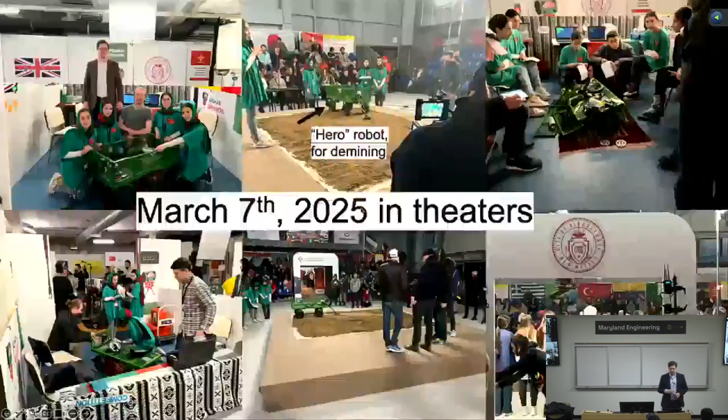That movie has something to do with when I was at WPI faculty. The director, Bill Guttentag, reached out to us because he saw a YouTube video where one of our demining robots was featured. He said, I want that robot for the movie. I said, unfortunately, that robot doesn't exist anymore. He said, well, thank you, but it was worth reaching out. Then I said, wait a second, what do you actually want? He said, we need this demining robot. I asked, can you give me the movie script? He said, yeah, here it is.

So I read the movie script. I changed some technical details they probably didn't get right. But more importantly, it was very clear that these girls, who were not allowed to learn about computer science, were building these robot systems. The person supporting this project was the person who actually did that in Afghanistan, Roya Mahboob, who now lives in New York City and had a huge role when the Afghan government collapsed and American troops pulled out. They got many more girls out because of her. But this is based on a true story.

When they reached out to us, I said, why don't we build you a demining robot from scratch? Since this robot is being developed in Afghanistan, maybe it's not the Air Force robot for $20,000, but something cheaper and simpler. So we got a little cart from Harbor Freight and put a DC motor beneath it. You can see here how this is the robot. There's a little moving arm, which is a windshield wiper we got from a scrapyard, and one of these metal detectors like seniors use at the beach looking for metal. We put that on there, and the entire robot essentially was very simple.

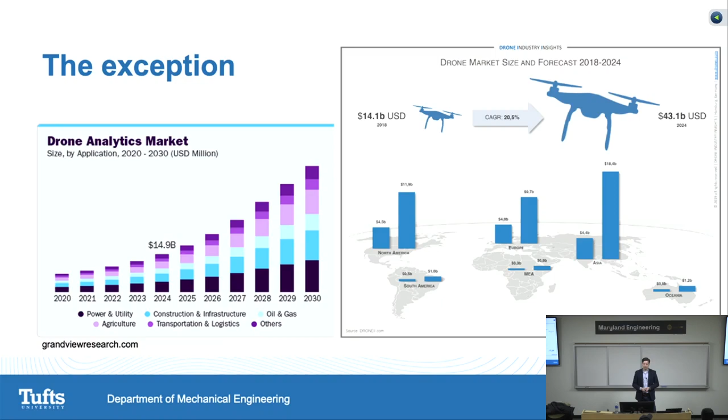So why is that possible? There's now such a big economy behind it, and the demand has increased so much over the years that you can actually purchase them at a fairly low cost. So now drones are definitely possible to purchase and use in large quantities.

However, my lab is interested in robots that are not just drones, but also terrestrial robots. The question is, how can we make increasingly intelligent robots without increasing their cost? If I have an infinite amount of money, I can just spend money and get more intelligent robots. But how do we increase intelligence without increasing the cost? That's a question we ask in our lab.

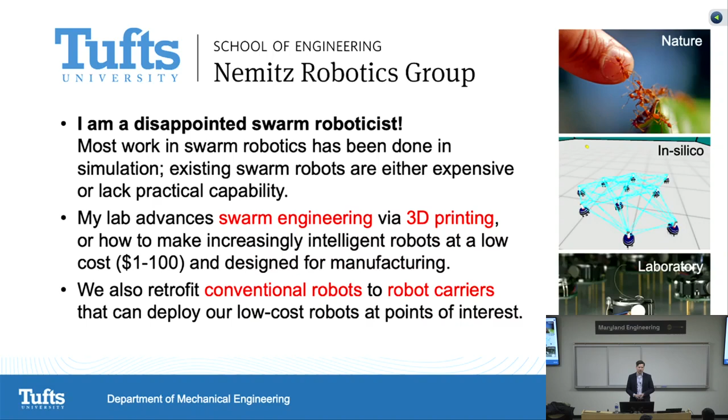On top of that, we're also interested in conventional robots and retrofitting them as robot carriers, so they take our little robots and put them at places where they can do real good. What that's actually useful for, I would like to explain here.

What we envision is this kind of nested deployment scheme, where you have a rover that carries a drone, and that drone deploys these smaller robots. For instance, it finds a landmine and detonates it. Because the robot is so low in cost, it doesn't matter - the robot will be destroyed, but it will also get rid of a landmine, saving lives.

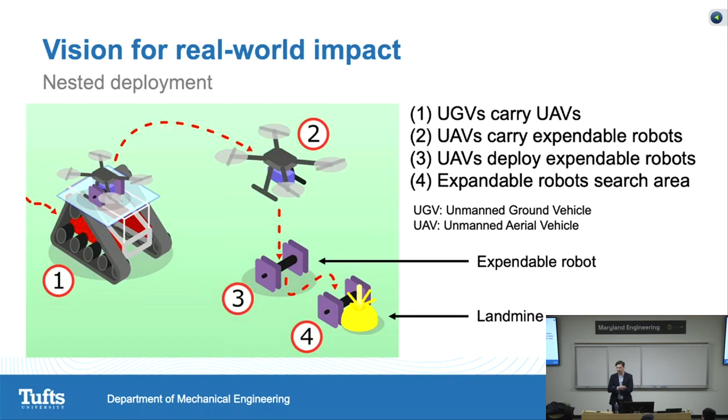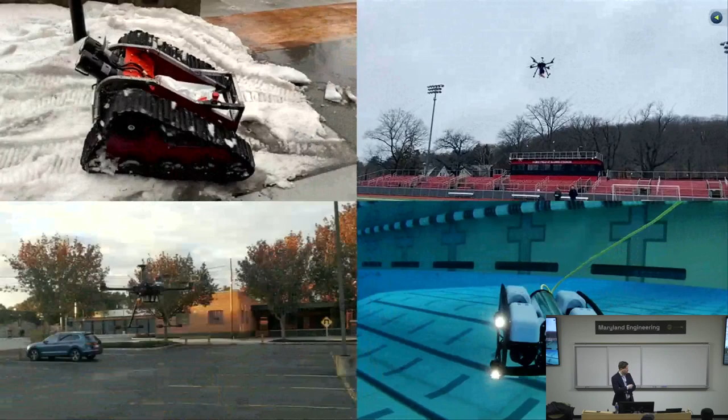These are the robot systems we've been working on: heavy payload drones, tracked vehicles. You can see this kind of nested deployment here in the top right, and also underwater robots in the pool. We use these robot systems as robot carriers.

When I did my postdoc, the question my advisor George Whitesides always asked was, who cares? Why would anyone care about me pushing swarm robotics? My personal answer is similar to what we did in the movie with the demining robot - to fight the entire demining problem of the world. One of the issues is that with landmines, mostly people who die from them are children, because they tap onto them, they fall into them, and they just detonate. So what can we do about that?

One of the issues when you study this a little bit is that to plant a landmine costs like $30, but to get rid of one is significantly more expensive. And as long as we don't build robots that are as cheap as that $30 landmine, I think finding a robotic solution will be interesting and possibly difficult.

So there are lots of different ways of doing demining. We focus on building very low-cost robots that are deployed from helicopters, and then they ultimately go onto an area and crawl around, find a landmine, and detonate it. There are different ways of detonating them, of course, so there are questions that can be answered.

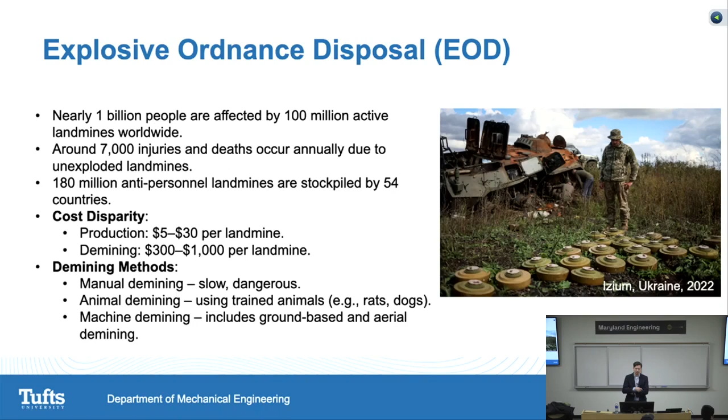Okay, let's try this again. So we just had faculty interviews at Tufts, and this happened to two of our candidates. I said those were always Windows laptops, and now I'm standing here with my Mac, and I feel really silly. So maybe putting a power... there we go.

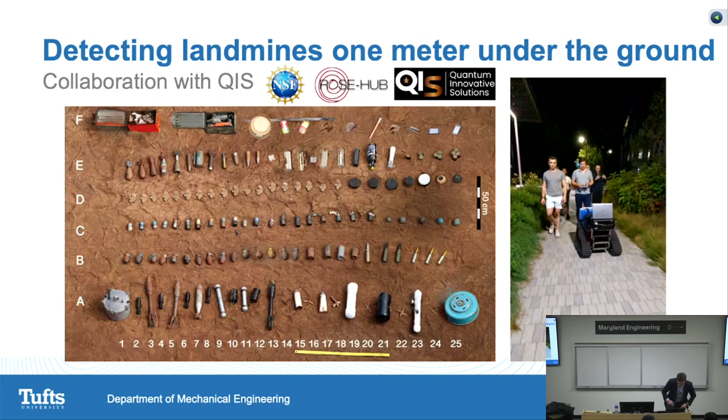This is us moving around with that robot, in Oklahoma, in the minefield we're working with. There are over 120 different landmines deployed at different, or the same, depth, down to one meter, and they're all sorts of different landmines. Some are Russian landmines, some are made from glass, and we were able to show that with the sensor in our robot system, we can detect essentially all of them.

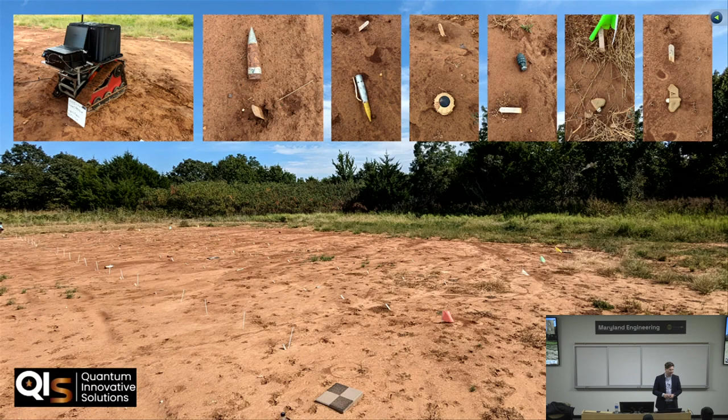Obviously, when you're trying to detect landmines, you're not driving over them with a tracked vehicle. So in this case, we only facilitated testing whether the sensor actually works for finding these landmines. Then Bloomberg was reporting on that, and people got really excited.

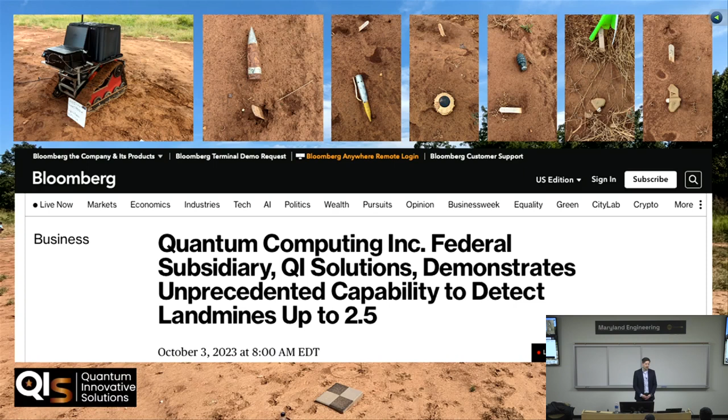Shortly after, we jumped on calls with some of the Ukrainians. I'm not sure they were for the Ukrainian forces, but there were some government links. Ultimately, we talked to a bunch of Ukrainians, and they were interested in using that technology to find landmines, as they clearly have issues with that currently.

So, landmines. I quite like to help with missions that deal with demining, and then also we go in the field and find them with collaborators.

But I'm also working with the Department of the Army on hydrogen-powered UAVs. Why would I care about that? Well, hydrogen-powered UAVs can operate for 24 hours, and in this project we autonomously refuel them with robot systems, which allows 24/7 operation.

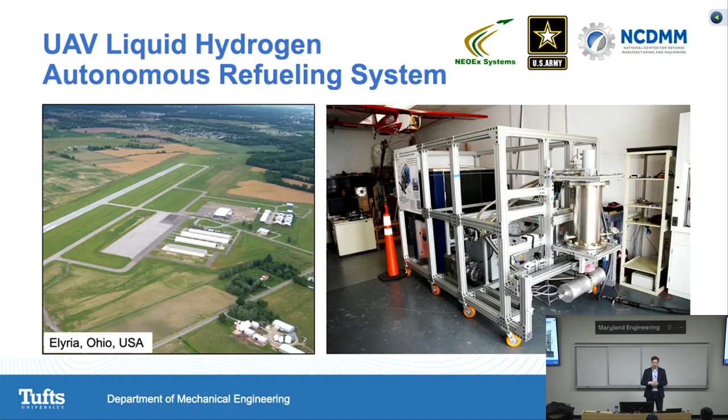These UAVs are very useful for deploying these smaller robots that we develop. My research is about all the other parts that have to be put in place in order to make demining actually a reality. We not only have to find landmines, but we also need to get robots that can actually detonate them in place. So I'm working on these things in parallel with a few companies and military collaborators.

Now I would like to talk about the swarm robots we're developing, and I would like to introduce two different types. One is going to be a 3D printable legged robot, and the other is going to be a fluidic robot.

With the fluidic one, you'll see my main point is that while I can't 3D print electronics, I can 3D print fluidics. That means whatever the fluidic robot does is at the cost of a spool of filament, and that's exciting to us.

But let's first focus on the 3D printable legged robot. As you can see here, there are a bunch of examples of different soft-legged robots, and Ryan has a really nice robot over there that he developed—it's a fluidically powered robot that moves its limbs, and there's a bunch of other work doing similarly exciting things.

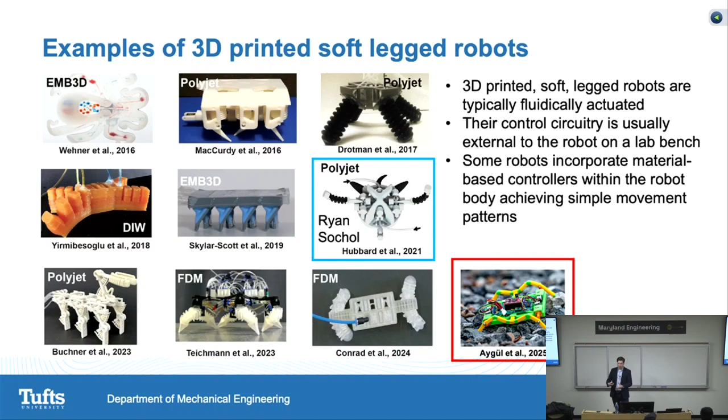Some of these robots incorporate material controllers, and we now develop one that is also a soft robot, but we call it more soft-hybrid because it's a combination of soft materials and hard materials. One thing we really like is that it gets outside of the lab. This is the robot climbing up a little slope.

What we did there, we were kind of clever with how we think about linkage design, and how we take a classic linkage that we all know—four bars, for example—and translate them into something that is soft. The framework we introduced, in a paper that was supposed to come out this week but might come out next week, is inspired by nature and how legged animals move.

Once you identify a foot trajectory that you really like, you can take that and implement it with a mechanism design, a classic mechanism design. But you don't end there—you then translate that into the soft domain by assigning different materials to different parts of that leg.

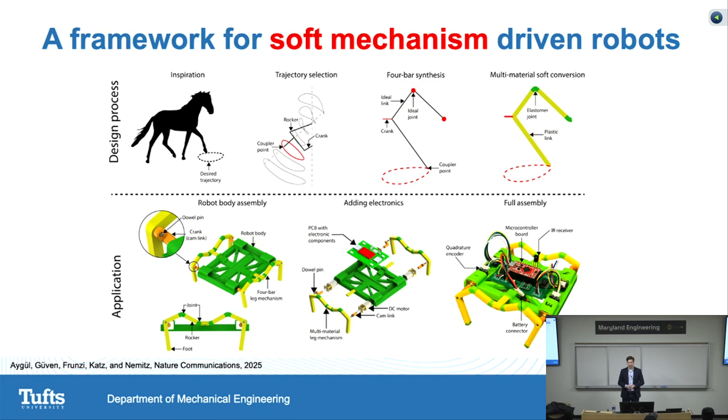When you do that, you develop actual robots that are soft and squishy, which makes them impact resistant. At the same time, they are legged robots that can actually traverse over environments, so they're fast and useful. If you look at all sorts of legged animals and which one's the fastest, which one's the slowest, all of them in this case are legged.

And if you look at them, how they move their legs, and look at the trajectory of the foot, you can see that it's a closed loop trajectory. That closed loop trajectory is actually quite important, and humans have obviously the same trajectory. We lift our foot and move forward, and that is a feature of legged species, including ourselves.

That closed loop trajectory is in direct contrast with open loop trajectories. For instance, this worm here is trying to inch forward, and that's perfectly fine, but it doesn't have this closed loop trajectory—it's an open loop trajectory. Closed-loop trajectories are particularly useful for fast locomotion.

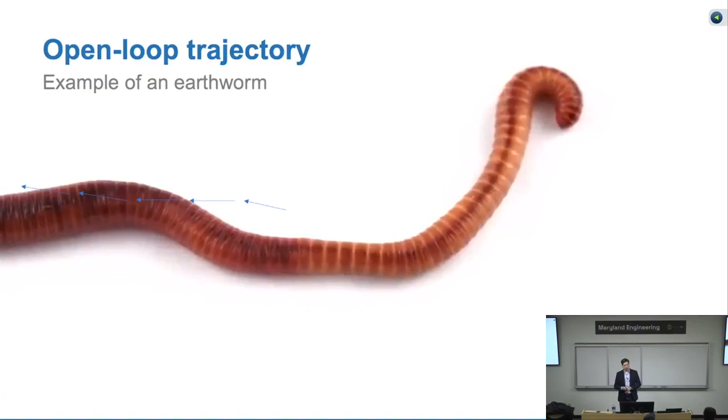So biology or nature has been a great teacher in that regard, and taking inspiration from that is useful to build robots that can traverse difficult terrain.

So how do we go about this? You first find a legged animal that you really like, in a specific environment at a specific speed. Let's say you really like crabs and how they maneuver over difficult terrain. You pick that particular animal, a crab—say a snow crab—and it moves kind of sideways. It doesn't seem too fast, but that's a typical locomotion gait.

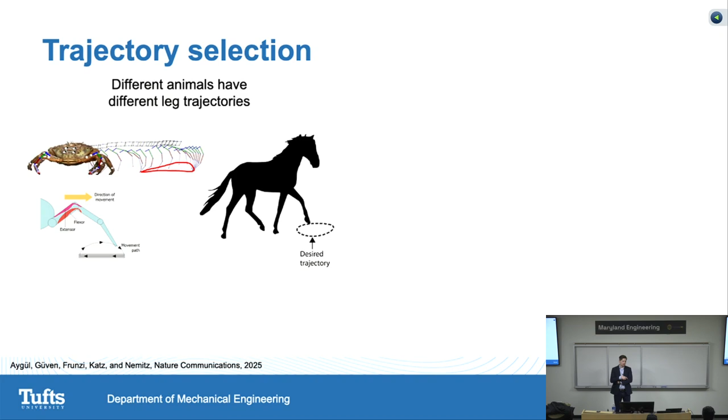And then you take that and look very carefully at the trajectory. Once you identify that trajectory, you can then build a mechanism from it.

As it turns out, if you look at the trajectories of horses, that's fine, but as they change between different gaits, the trajectory will look different. So you really need to identify the animal, the trajectory, and the gait they use for this particular task, and then try to replicate that trajectory.

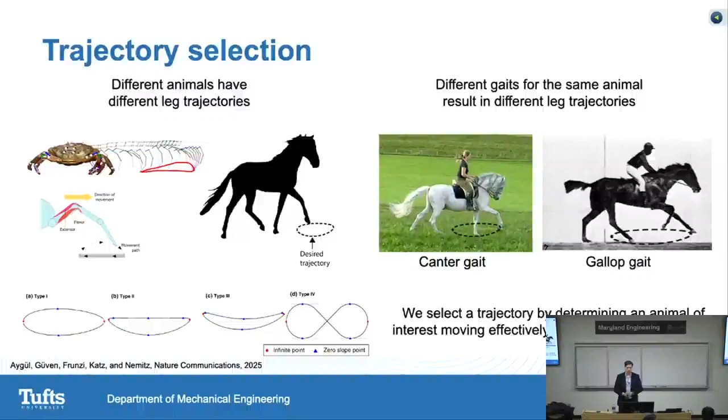There are all sorts of different trajectories across animals. Crabs have a different trajectory than other legged animals, and octopuses move forward with a really interesting helix-type motion. You'll be surprised what trajectories you can find.

Once you're there, you can essentially develop a mechanism. In this case it's a 4-bar linkage—a classic undergraduate or even high school idea where you have a rocker, coupler, and a motor, then a crank, and when you move that you get actual locomotion out of it.

If you look at this picture on the left and then on the right, you can see we did the same thing. You still have the crank, you still have the coupler, but we extended it—as people do in legged robotics—by adding an additional link at the coupler point, and that becomes the leg of your robot.

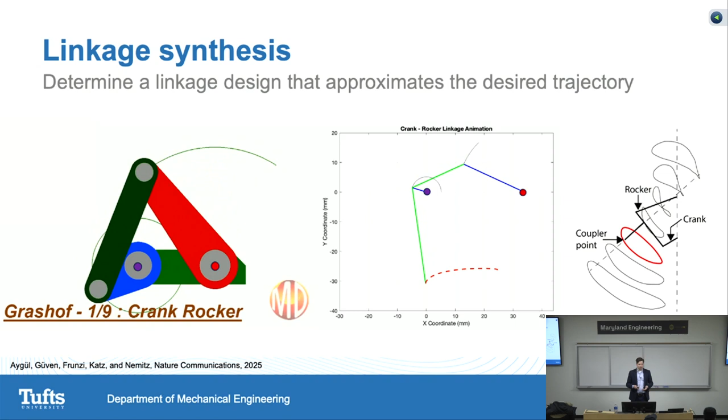If you then start to move it around, you can see how the 4-bar goes in a specific direction, and the same thing happens with your own designed linkage, but now with an actual leg. From there you can change your 4-bar and vary the lengths of the different links, and based on that you get different trajectories, until you find the one that most closely resembles what you're after.

Of course, once you have the leg trajectory you picked, you can do some trigonometry and develop an analytical model for that. Then you can compare it to actual simulation and real-world experiments.

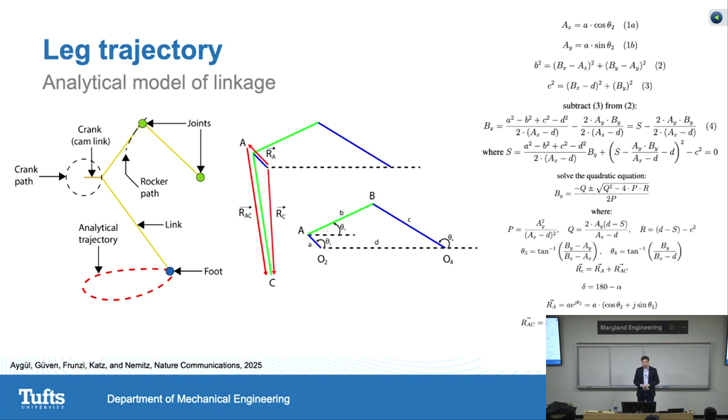It gets really interesting when you've identified or synthesized a linkage, and then translate it into the soft domain. Because then these pin joints that you have here, in our framework, become parts made of different material softness.

This yellow material has a higher shore hardness than the green material—so the yellow is more rigid and the green is softer, which means when you apply a moment, that little green joint will give in, and you get a nice movement out of it. We'll see that in a video in the next few slides. But this is the important part: you go from a pin joint to something that is a multi-material design.

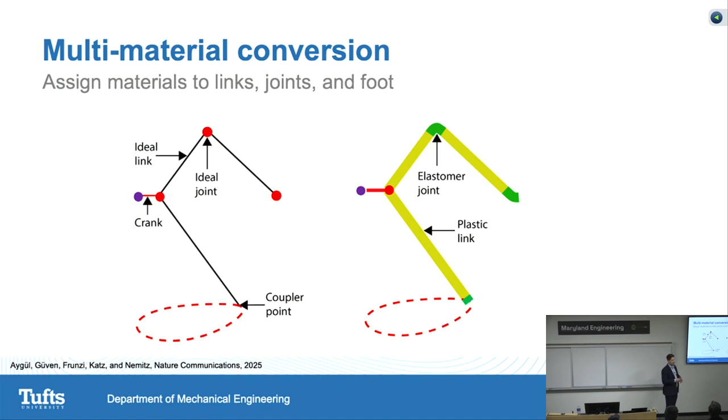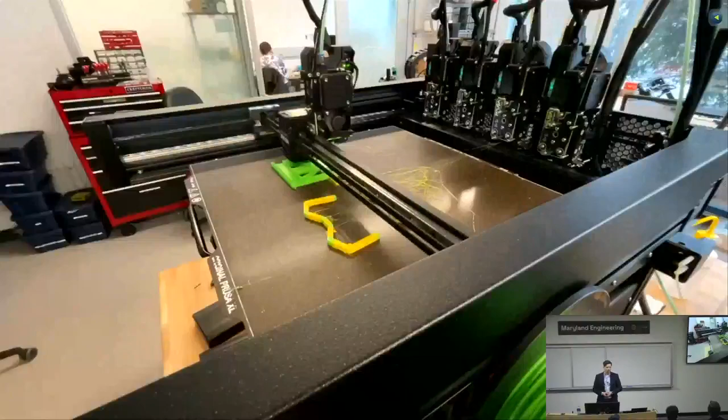Once you identified all of that and did the multi-material conversion, you can then 3D print your robot. You use a multi-material printer, a Prusa XL, which has different print heads. You print your thermoplastic polyurethane, in this case two different ones, and then you're essentially done with the robot body and the legs.

Then you can finally put motors on there to make it rotate and move the leg, and compare what your finite element method would predict versus the real-world experiment.

The black line shows the trajectory, the analytical one that we developed from trigonometry. Now you have the simulated one, which is similar, fair enough, but then you have the one from real-world experiments, and they are also similar, but somewhat different.

When you look at the different softness of the materials, you'll see the yellow one is made from a different material composition than the red one. The yellow one in particular uses more rigid materials. You can see on the top right the different shore hardness values, 85A, 95A—the higher the number, the stiffer it is.

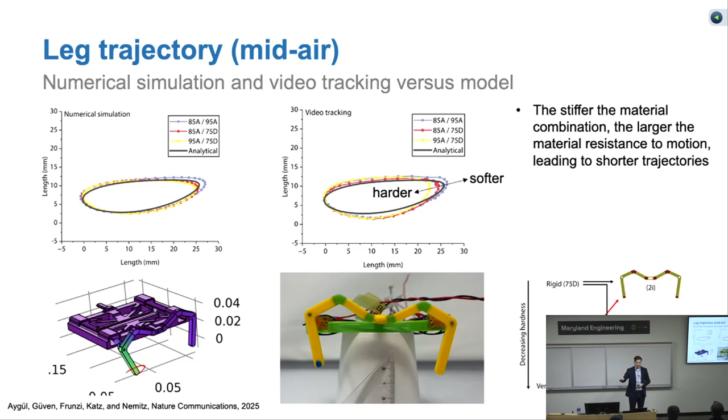The yellow one has 95A75D, our most rigid material combination. That means when the motor tries to move that leg, it experiences more resistance than the other combinations, which is why it doesn't follow the exact perfect trajectory you'd get with a rigid system.

Of course, when you print different materials, you need to look at the interfaces and how well they combine. The moment you print two materials, especially with a tool changer, you deposit a material and it solidifies, then you come with the next tool head and print another material. That interface becomes very important, and a high print temperature helps fuse those materials together better.

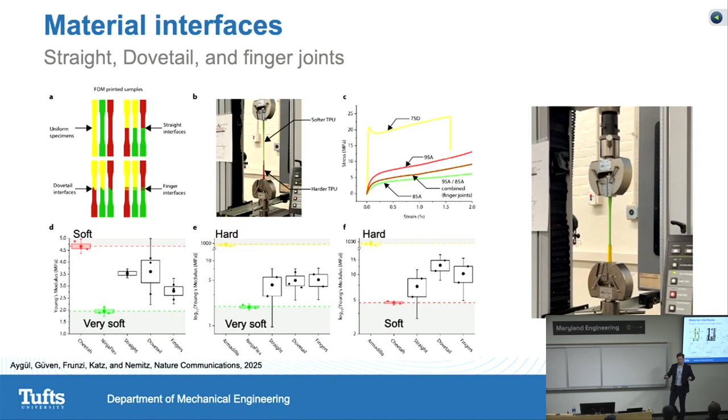What I'd like you to take away is that if you combine two different materials or shore hardness, the combined Young's modulus is typically in between the two, which is intuitive. What's interesting is if you have a soft material and another soft material, it lies in between. But if it's a very soft material and a hard material, it tends to be more on the soft side. Whatever combination you have, it will exhibit the behavior of the softer material, which makes sense—it's the one that gives in earlier than the rigid one.

You can see how we also did cyclic testing to really show that these interfaces don't just operate once or twice, but hundreds and thousands of times.

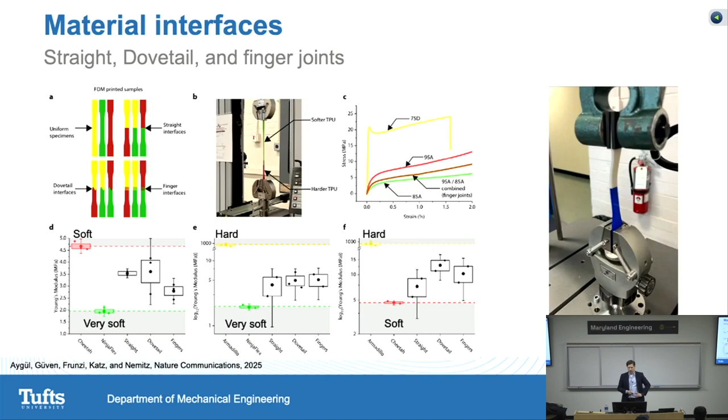Now this is one of the things that's really exciting. Soft robots—every soft roboticist will tell you—are great because you can smash them and they survive physical impact. Well, this thing does it too. And it's not so soft that it's slow, but it's soft enough to withstand impact.

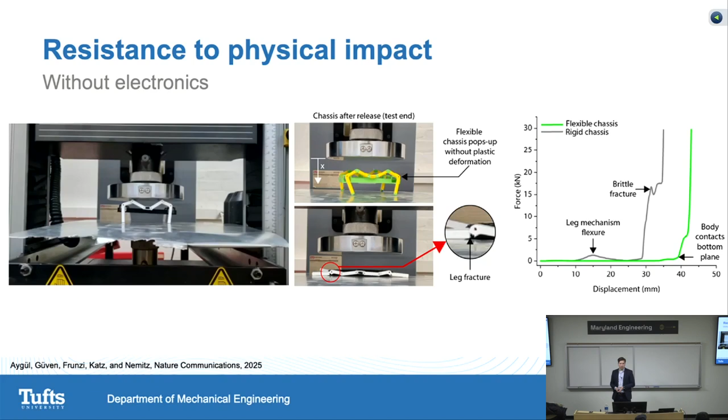So what that means for us is I can get the advantages of soft robotics while still being in the domain of semi-soft materials. This soft hybrid gives you the advantages of soft robotics and some of the advantages of hard, rigid robotics. That combination we find extremely exciting.

Now once you do all the parameterization, look at the interfaces, and go through all of that, ultimately you can put everything together. You make your own circuit board with Bluetooth so you can remote control it. We actually put an infrared transceiver on there so you can communicate with it and give it remote instructions.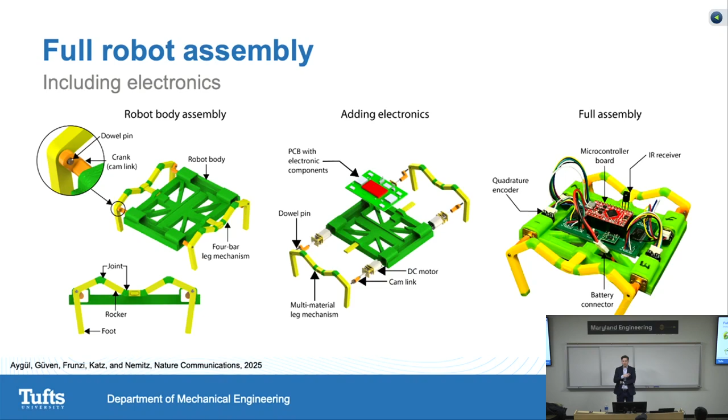And if you now take this combination where you have a nominal linkage design—by that I mean we can change the linkage itself by making it a little bit more vertical or a little bit more wide.

If we pick that design, and then choose two different materials—in this case the most rigid one and the softest one—then you get these kinds of trajectories. And you can actually analyze what is the smoothest and best behavior.

We also looked into how fast these robots can be. You can see on the top right we get 0.42 body lengths per second in this prototype. Then you can go through all the others. We can not just go through synthesis, but also different materials, and compare them.

The rigid material combination is the one that had the slowest velocity, and what you'll see with the robot is that the moment the material combination is on the more rigid side, the motor struggles with overcoming that resistance it creates. And then everything becomes kind of stiff.

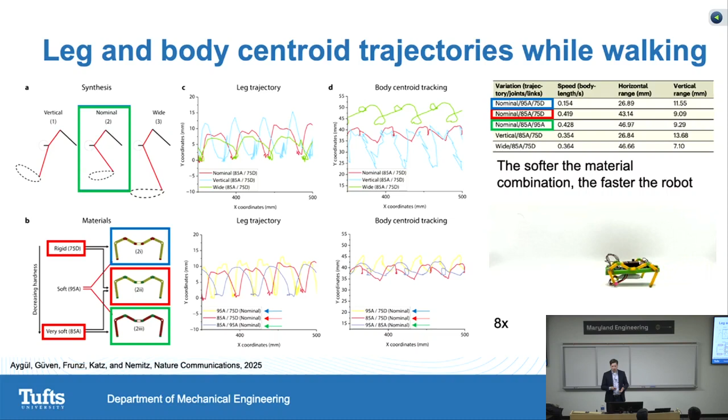The softer you make it, the more natural it looks—it almost feels like a biological system. I'll show you a video later on where you can see how the entire robot body moves. We really get these features of soft robotics without landing in the entirely soft domain, and I think there's a lot of real-world applications there.

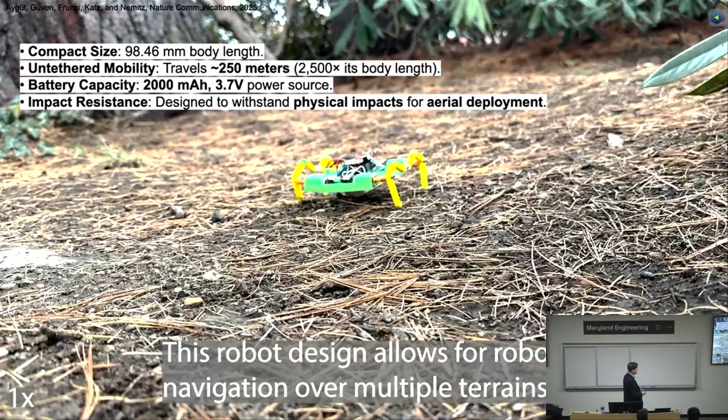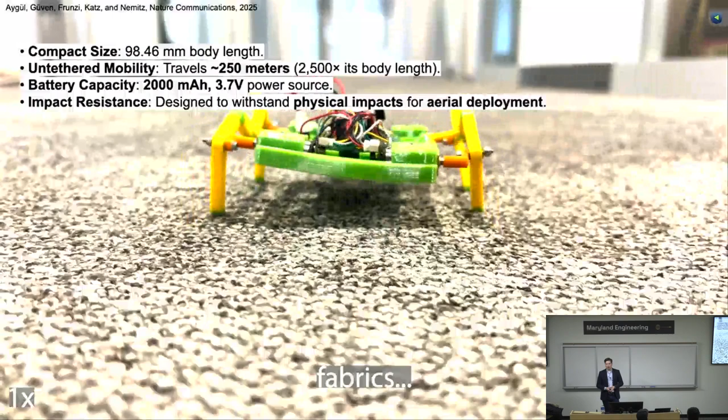So this is the robot that we currently have. It's fairly compact with 100 millimeters. It can move 250 meters, so 2,500 times its own body length. With a 2,000 milliamp hour battery and 3.7 volts, we were able to operate it for about 1.5 hours. Here you can see how the entire robot body is just moving around.

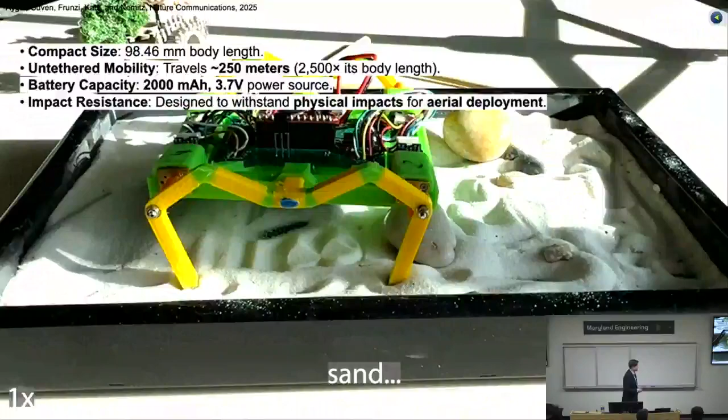That's a direction that we like to see. We show how it moves over different terrains such as sand and rocks and other environments, and sometimes it struggles. What's the problem? Well, it doesn't lift the leg sufficiently up.

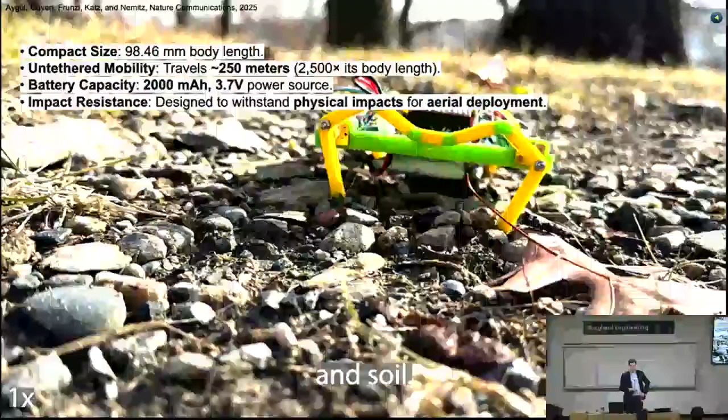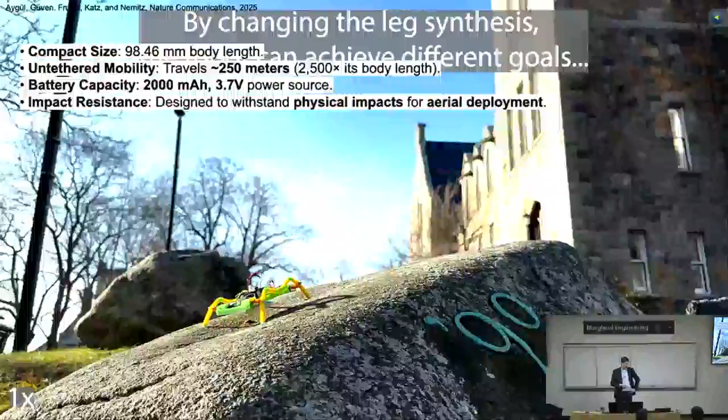So now it would be interesting to have a different trajectory, a different linkage for that design. Now we're thinking about whether we can change the leg on the go so it can change its linkage and change it in a way that allows it to overcome different obstacles.

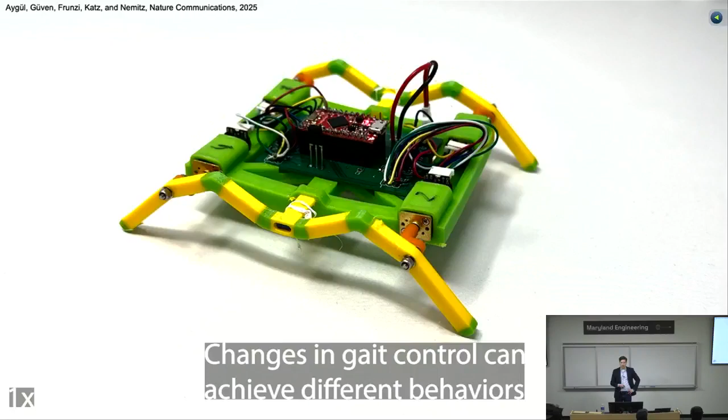When you see how the robot does a point turn, you can see how everything is moving. You can see how absolutely everything—this is a point turn—the entire robot body is moving. Everything is somewhat moving around.

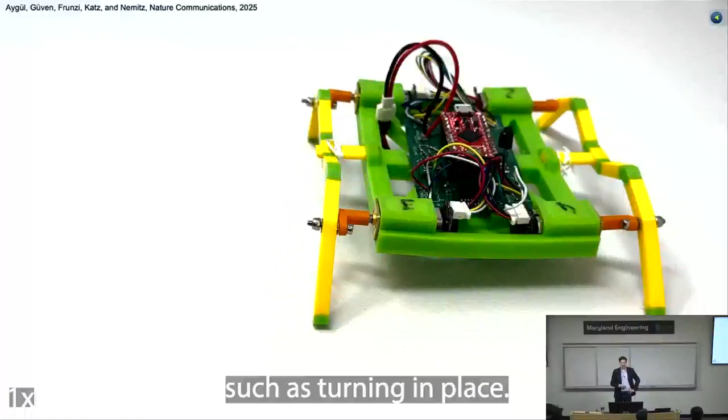Now, again, we're interested in doing a pause-and-print fabrication strategy, where you print something, you pause, you put in electronics, you continue printing, and you do that all automated.

Here my student drove with his BMW. I have no idea how he gets all that money, but he drives with his BMW over that robot.

Of course, there's no electronics on there, but again, you can encase that. That's something the Navy is now very interested in—encasing it entirely, throwing it from helicopters, these sorts of things.

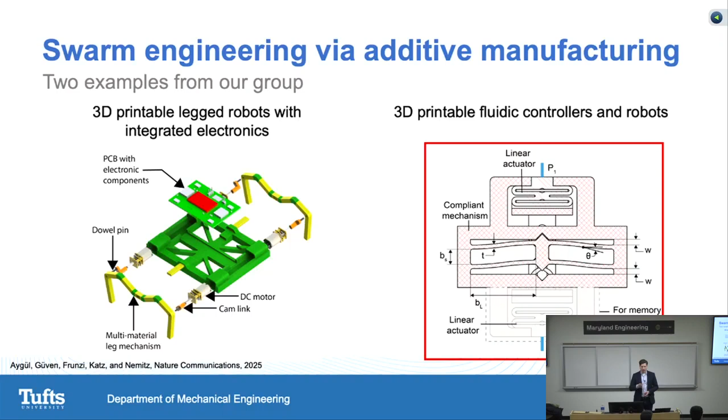Now, that was all about this kind of legged robots and how we can design them. The other one I'd like to highlight is this kind of fluidic controller, which is a very different domain. The commonality is that they're 3D printed, which to us means we can make them at low cost.

So the definition of a computer is a programmable, usually electronic device that can store, retrieve, and process data. But what if it's not usually electronic? Then you get a computer, and the computer you see here is a fluidic computer.

So you can process information electronically, but you can also process information via fluidic signals. You can store information via fluidic bistable mechanisms. You can develop entire state machines. You can develop combinational and sequential logic from them.

You're back in Computer Engineering 101, where you realize, oh, I have all these different logic gates, I have all these different memory elements, set-reset latches. What can I build from them?

A question I typically get is, Markus, why would you go back to fluidic computers? Electronics is so good, and our transistor-level electronics is already in the nanometer region. It's great. And the answer to that is, yes, your electronics is really good—until it isn't.

That is, if there's a strong magnetic field, chances are your device is being at least deleted, or in the worst case, completely destroyed.

If you have an electromagnetic pulse, that is something that can destroy electronics. A lot of this research was done during the Cold War era, where people were afraid of electromagnetic signals and ionizing radiation from a nuclear attack. What would actually work if our country was attacked? Fluidics has really compelling answers to that.

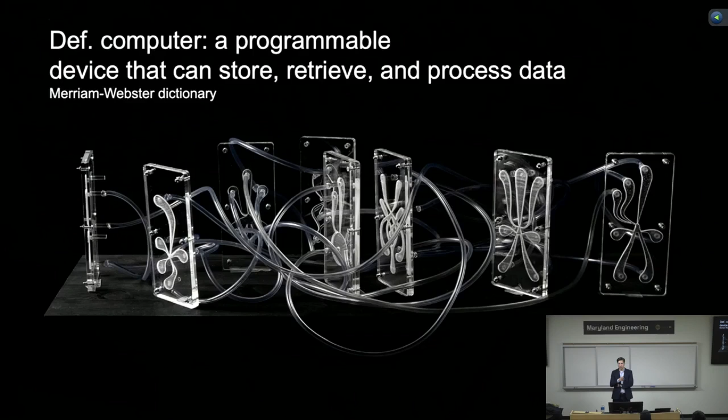I bet when you're at Mars, you can 3D print whatever you want based on what you experience, versus thinking in advance on planet Earth and hoping what you have is good enough for what you'll encounter. So there's this mindset that we should be able to fabricate solutions to the problems we encounter.

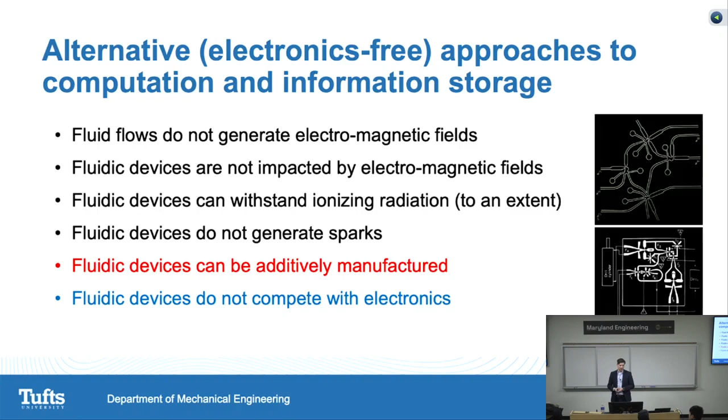Now, these are all reasons why I'm excited about fluidics over electronics. Most importantly to me, while I cannot 3D print electronics, I can 3D print fluidics. I don't want fluidics to compete with electronics—in fact, it can't—but it has advantages that electronics doesn't have.

So this is the work on 3D printed fluidic logic gates. You can see Ryan's work there as well, with PolyJet printed logic gates. I love this work—I think, I'm not sure I'm supposed to tell you, but I think I reviewed the paper. It was really, really great work, or still is.

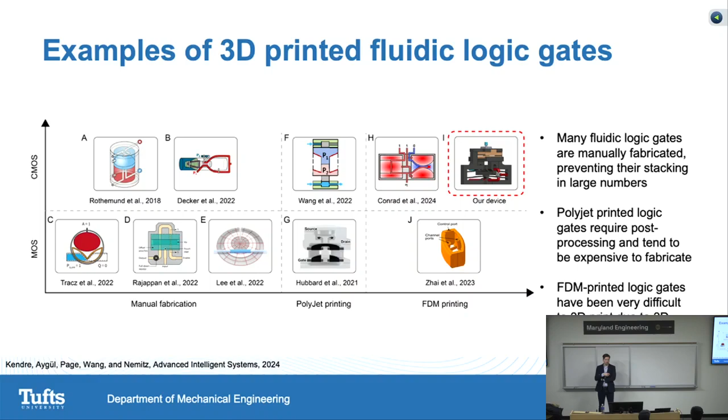So the question, though, is with all the logic gates we have here, how do we make them so cheap and reproducible that anyone can make them, and so cheap that we can scale them in large numbers? One of the things we did was develop a CMOS-equivalent logic gate from flexing beam mechanisms that allows you to compute information and build computers.

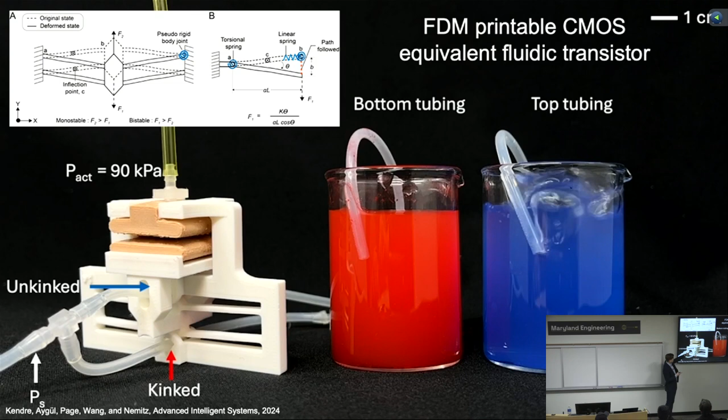This is how it works: you essentially have a device, that white device on the side, and it can move between two different states. This is a bistable mechanism—it has the ability to push down, and then when it releases the pressure from this soft actuator, you apply pressure, it goes down, you release the pressure, it flips back. That allows you to compute information.

Why do we close one tube and at the same time open it, and vice versa? Because that's considered complementary switching, which is important for making devices that are power efficient. CMOS-equivalent circuits are more power efficient than if you only squeezed one tube. If you only squeezed one tube, open and closed, that would be less energy efficient for several reasons.

One reason: if you have a tube with a pressure source on one side and a balloon on the other, the balloon inflates, inflates, inflates. Now you squeeze that tube and the balloon stays inflated. But with fluidic logic, whenever I put a pneumatic signal of 1 on the tube, I want it switched on, and when I release it, I want it switched off—I want the balloon to deflate. With a single tube, you don't get that.

If you have two tubes, one opening and the other closing, connected to a balloon, whenever you apply pressure to that actuator it either inflates or deflates. So you're not in that floating state, like in computer engineering, where you don't know what your output pin actually is.

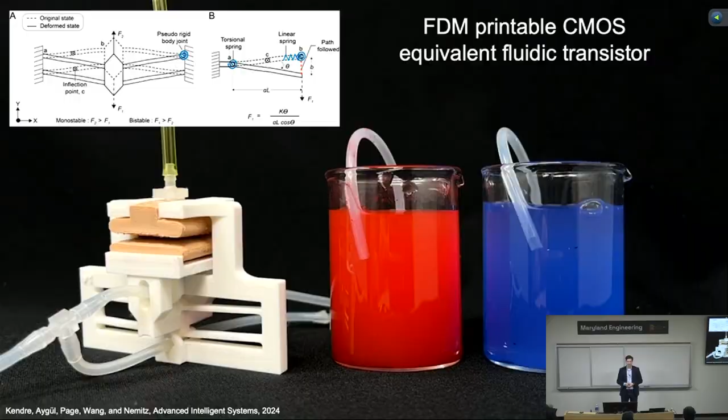Now, when we develop these devices, we also want to understand how we can change them. Probably the most interesting thing is that with our paper, you can figure out, say, I want this to switch at 30 kilopascal, and you can figure out based on the parameters what to change to achieve that.

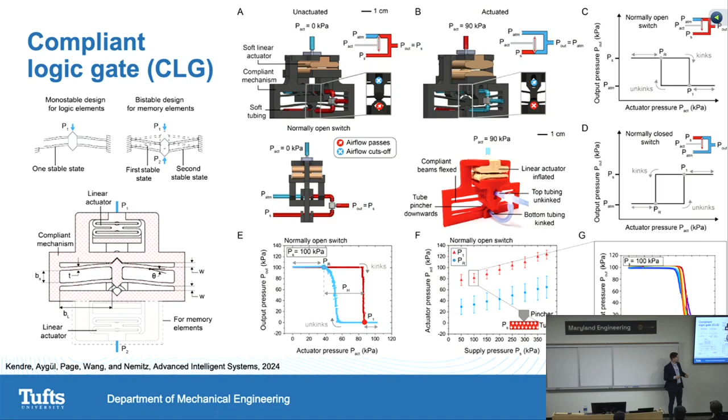The other thing you can do is change the parameters so that they actually become bistable. With all these different parameters you can change, such as beam thickness, that's T here - the thickness of that beam can determine whether your device is monostable or bistable. Then the gap that you have here, W, determines that as well.

I think the most interesting thing you can do with that logic gate, this flexing beam logic gate, is design it so it becomes a memory device. Similar to the pop toys, when you press it from the top it flips down, you take your finger away and it flips back. The alternative is you have a membrane, you press on it, it flips down, and it stays there. Then you have to press from the other side to get it back up. The latter one is a memory device.

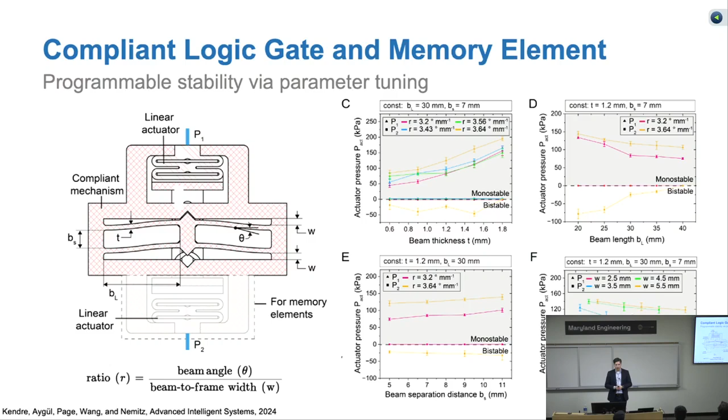You can store information on materials by having a truly bistable system, where the moment you actuate it, it stays that way. You have to push from the other side, then it's on the other side - then you can store information. That means you can develop fluidic programs stored somewhere in your materials, and use them to execute different robot behaviors.

Once you have one of these logic gates, you can make NOT gates, AND gates, OR gates. The only difference between an AND gate and an OR gate is where you put your tubes and apply supply pressure, atmospheric pressure, and your inputs. As you can see here, the device is still the same.

If we did this in our lab experiment, I would give you one device and tell you: now please put on that actuator your input signal A, and put atmospheric pressure on the top tube and supply pressure on the bottom, and then you have a NOT gate. Then I would ask you to change it to an AND gate, and you would just change that input-output configuration. Once you do that, you get these logic gates.

With a NOT gate, whenever the input is 1, the output is 0. With an AND gate, you have two inputs - when both are 1, the output is 1, otherwise it's 0. The exciting thing is, again, you're back in computer engineering, and now you can combine them in different ways.

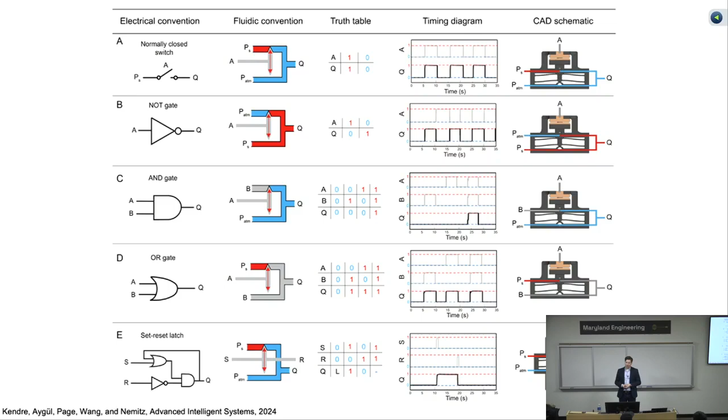One of the ways you can combine them is by putting them all in a circle. You put one NOT gate onto the next one, that one to the third one, and the third one back to the first. Because you have three of them, an odd number, there's no stable state.

How could it be? You have a NOT gate that outputs a 0, that goes into the next one, that becomes a 1, the 1 goes to the next one, that becomes a 0, and then the 0 goes back to the first one, which was previously a 1. So there's an instability in states. That means if you put 3 NOT gates together - it's called a ring oscillator - you spontaneously get an oscillating signal.

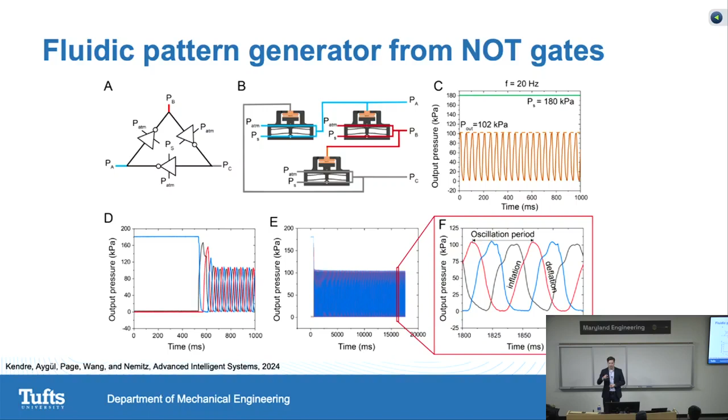That's really exciting because it means I can apply a constant pressure, such as from a CO2 cartridge, and get an oscillating signal as output. That's really important because that pattern generator can be used to actuate, for instance, legs or whatever else you want - a swim bladder of an underwater robot, whatever you want it to be. This is a central part of these fluidic logic systems: constant pressure in, oscillating signal out.

This is now a demonstration. This is not the robot that will go onto minefields and detonate landmines, but it allows us to study fluidic systems. Here you can see how we have a ring oscillator with 3 of these NOT gates together in a circle.

And then when we apply that output pressure to that robot, it inches forward.

Apologies that this video stopped again. Let's see where that... There we go. I'm not sure, my laptop doesn't like me today.

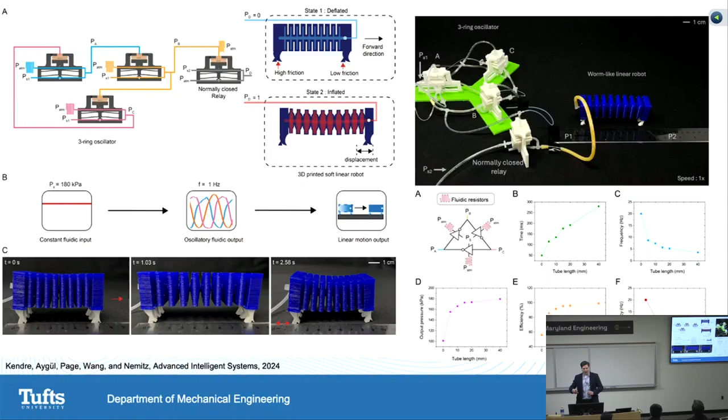You can see how it essentially moves forward. And you can also see how these NOT gates are connected to atmosphere, but I put a tube on the outside. Depending on how long the tube is, you can change the oscillation frequency. So again, these are parameters you can play with, and depending on what oscillation frequency you select, you get that oscillation frequency.

Here, just for fun, my student surprised me with a stepper motor, which I thought was really interesting. So now you have a constant supply pressure, you get an oscillating signal, and from the oscillating signal you get rotary motion. So now we're in the business of rotating motors with a constant supply pressure.

Again, this is like a demo to show what we can do. Putting that in a robot will be more difficult, but it shows you the idea of what you can do with just 3D printing. We're talking about 3D printing with thermoplastic polyurethanes.

It's not an expensive printer. In fact, you can print that with the Prusa Mini, which costs like $400. Obviously, if you do multi-material printing, it gets a bit more expensive, like maybe $3,000. But it's very inexpensive to make these systems.

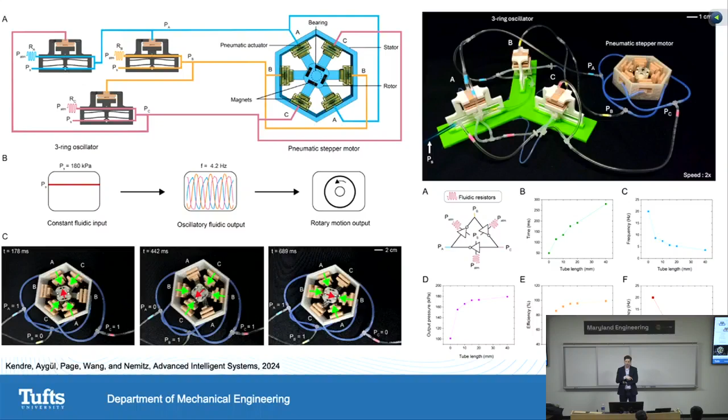In fact, all of this you can do with a Prusa Mini, because all these materials are single materials and then they're being assembled. So it's pretty exciting. When I teach my printable robotics class at Tufts, students pick up on that and implement their own stuff. They make jellyfish that go up and down in a water column, or little robots that walk on the bottom of a water tank, and so forth.

So the cost of this fluidic stepper motor, half of it is really just materials, but it sums up to like $6 or so, $6.73. So again, be excited about it because it is inexpensive.

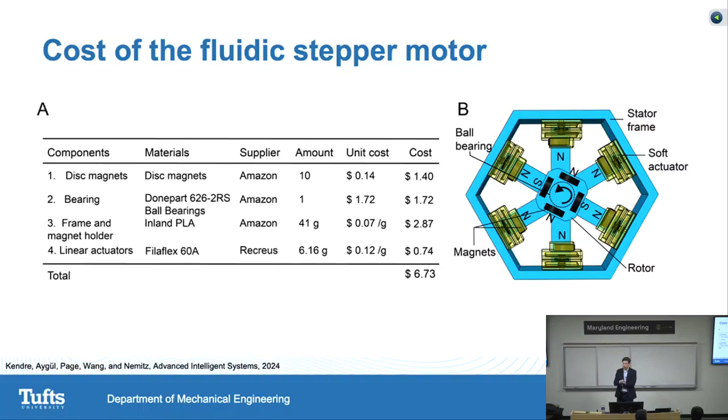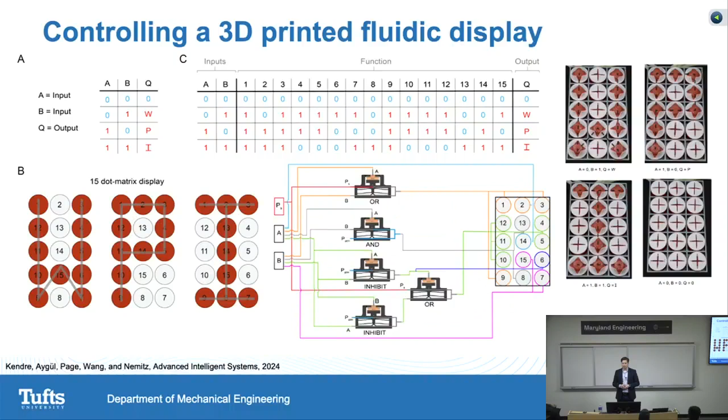That is something we're very excited about, and these fluidic displays are a good demo for this sort of thing. This is how it actually looks implemented. You have 5 logic gates, and then you can switch between these different states.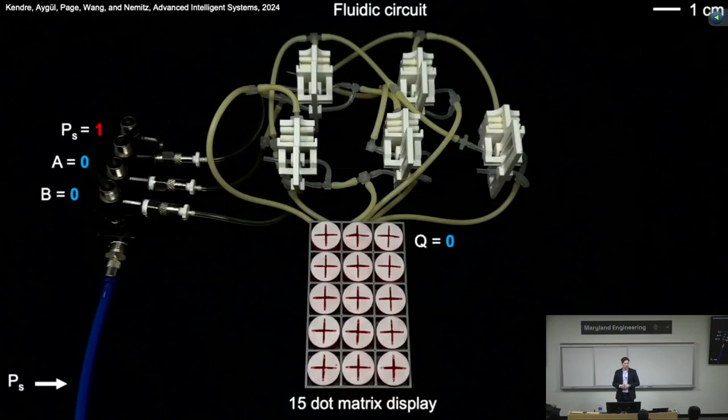Here my student switches on the supply pressure. We have 2 inputs, A and B. We have 4 different pixel configurations that we want: nothing, W, P, and I. He goes through all the different states, and that's how we can now show how the information is being displayed.

Now, this is the conclusion of the talk.

Soft mechanism design, the one that I showed you with the leg, is pretty robust and cost efficient, and I think we're getting there where we can use them for practical applications.

Fluidic systems are interesting to us because they will only cost as much as a filament spool. In the conventional trade-off in robotics, more money means more capability, but we want more capability at absolutely no more cost. So what I 3D print today will, in a year, be much more sophisticated and have much more capability, yet I spend exactly the same amount of money. There's a lot of design space and opportunities there.

In terms of miniaturizing these devices, that is also something we have been working on. However, I always tell people that's not the goal. The goal is not to make it as small as possible, because we're not competing with electronics. We can make it smaller to some extent in order to stack them.

But to me right now, the next thing is how can we 3D print fluidic transistors on a print bed and connect them automatically, so that you can have almost like a fluidic description language where you define a behavior, the computer determines what hardware has to be generated, and then puts it all out. You just press a button, and that logic is 3D printed together with fluidic actuators, and then the robot can walk off the print bed.

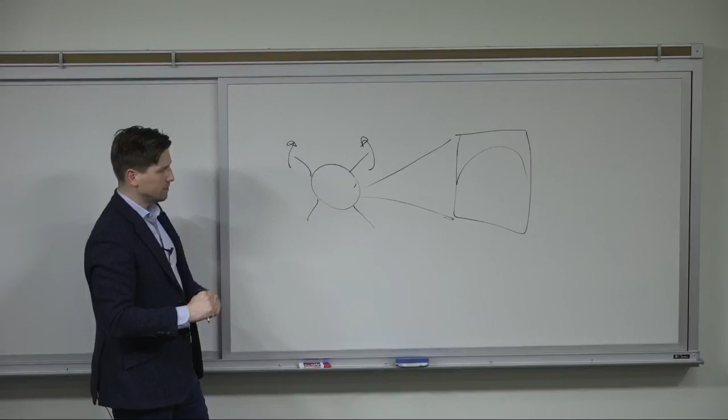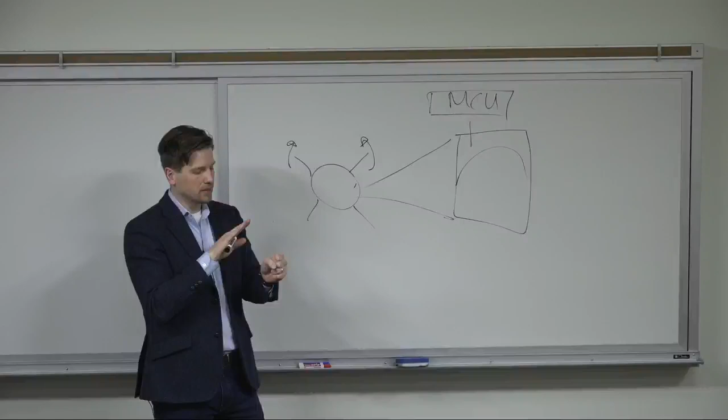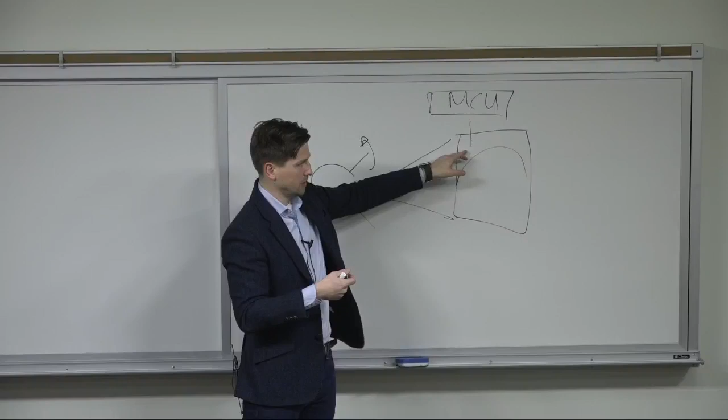Something we have proposed but haven't yet established is that if this is part of an oscillator, or if this is a fluidic memory device, you can, with a low-cost microcontroller, switch membranes electronically. That means you have a fluidic memory that allows different programs to be executed, and a microcontroller sits on top and says now's the time to execute it. The moment the microcontroller writes into that fluidic memory and flips the membrane—which can be done differently, for example with Joule heating and a low boiling point liquid inside—it evaporates, pressurizes, and the membrane flips down. The moment that membrane flips down, it executes its oscillating behavior, and that can be triggered with the MCU.

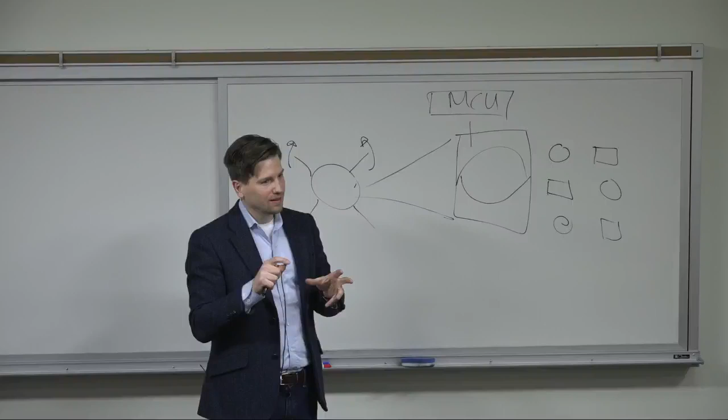That means you can have different robots moving at the same time, with all the oscillators activated exactly together. But also, if you had two different ring oscillators, you can start to synchronize them as well, giving you essentially two times three outputs. You can synchronize them in a way that allows you to operate different gaits, because now you have six outputs instead of three, and you can control exactly when they start. You can also connect the oscillators with one another, and that can synchronize them too. So there are different ways of synchronizing within a robot and between robots, but between robots it has to be done with electronics.

These really low-power, inexpensive electronic interfaces that are able to write into fluidic memory are something we would like to develop. We have a few ideas, and one of them is like a diode—essentially a blocked fluidic tube. When you apply a current through a conductive piece within it, it burns through, air is released through the tube, and then you can actually write into memory. But there are probably different ways of doing it.

Yeah, that all sounds plausible. I'm wondering, I don't know if you've seen it, there's a nice YouTube video where if you put a bunch of metronomes on a rolling platform, they eventually synchronize just through physical interactions. It might be interesting to have a similar demonstration without additional circuitry, showing synchronization between individual oscillators but with some kind of environmental stimuli.

Yeah, that's a pretty cool idea. Yeah, yes, please.

Dr. Nemitz, I really appreciate the talk. I'm part of Dr. Sokol's research group, and we don't actually do too much FDM printing. I wanted to know why specifically your group focuses on FDM printing as opposed to some of the other modalities.

Yeah, that's a good question. So what are the alternatives to FDM? We have stereolithography, we have selective laser sintering, which is more for metals, we have polyjet printing, which I hear you guys do quite a bit.

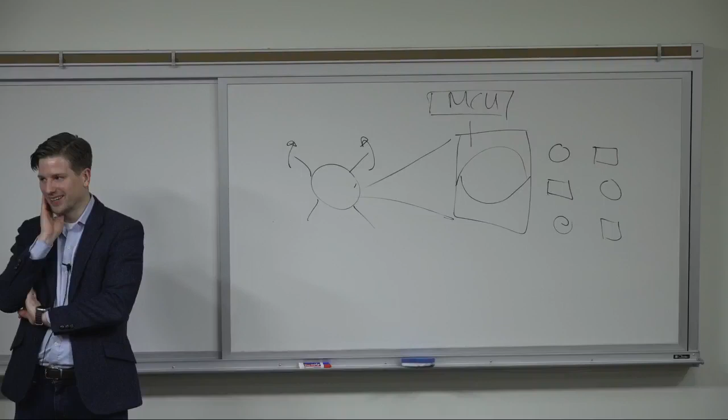The second reason is FDM printing easily allows for multi-material prints. Think about stereolithography - that's not commercially available for this. If you go to conferences, people talk about having a resin activated by different wavelengths, so you can get some multi-material stuff, but as far as I know, that's still experimental.

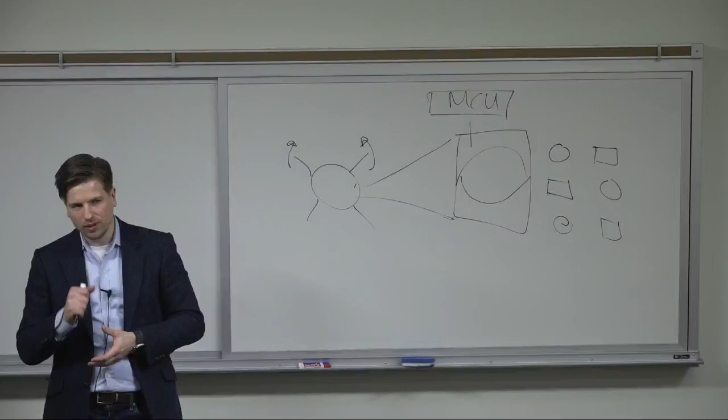So what other opportunities do we have in terms of multi-material printing that are inexpensive? That's why we're so focused on FDM, and now we have something we think is even more exciting, which we've worked really hard on. You guys can probably scoop us, but I'll say it anyway.

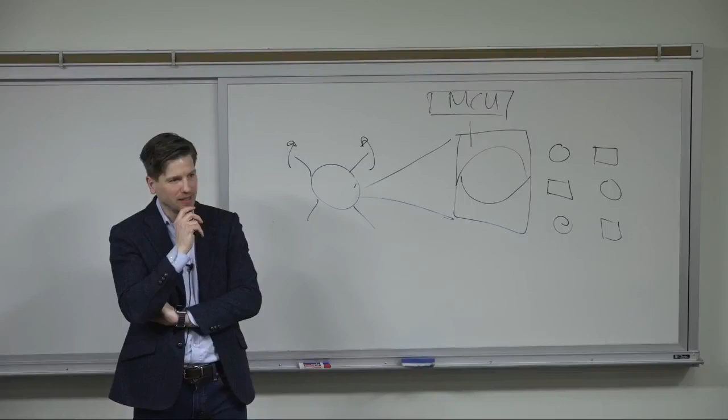We're doing pellet printing. All the filaments in the world are made by these companies - they make filament spools. So one asks the question, why do we print with filaments? The answer is we print with filaments because they act like pistons - they can be pushed into the hot end, then it melts and it all works.

That's good for rigid materials. The moment you have soft materials, that piston you push in buckles, and then it buckles out of the gears and all sorts of issues can come up. Of course, you can buy upgrades that compensate for that a little bit. But why do we print pistons to begin with?

Every filament manufacturer - their product is filament, but the input is pellets. They're like little granular pellets, purchased in large quantities, thousands of kilograms. They put them into the machine, and a filament spool comes out, and that's what we purchase. But there are way more pellets in the world than there are filament spools. So they rob me of a vast range of materials by dictating what I can and cannot print - they'll only offer filaments they think are commercially viable.

How many people print elastomeric material to begin with? That's where we're now drifting towards pellet printing - conductive pellet printing - extremely inexpensive, quite reliable, and much faster than FDM printing. So yeah, it's a good question.

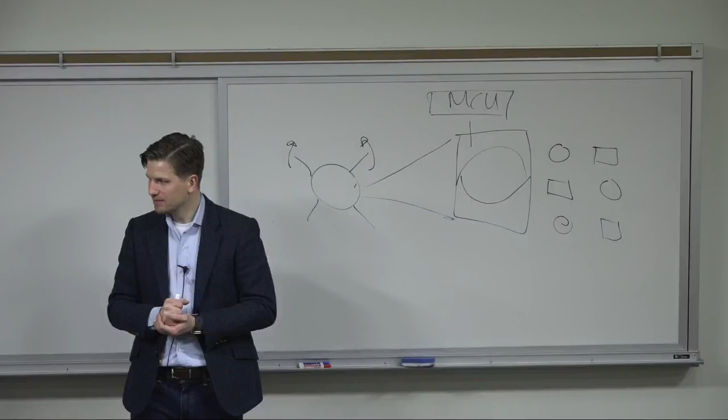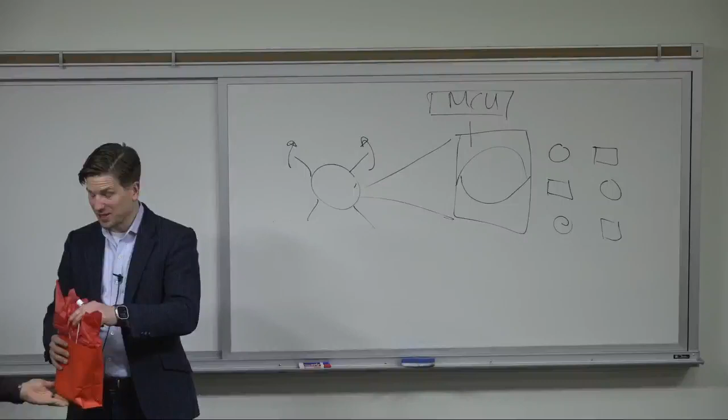Oh wow, this is a little present for you. Thank you so much, I appreciate it. I realize now I should have been a crab, but spoiler, it's a terrapin turtle. It's our mascot. That's awesome. But thank you so much, that was an awesome talk.